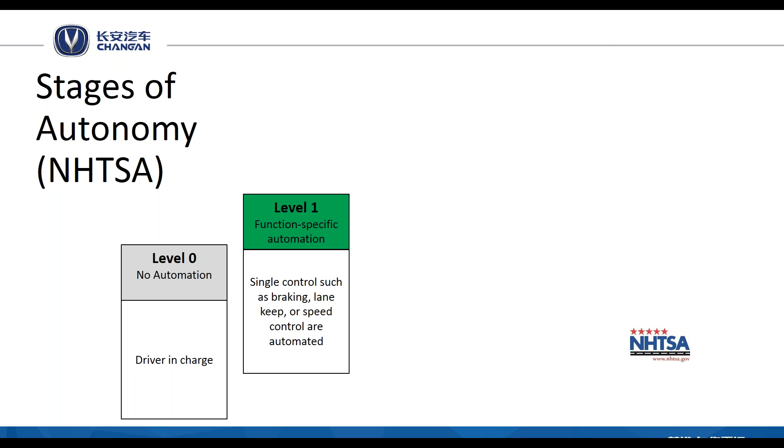Level 0 automation: there's no automation, the driver is completely in charge. Level 1 means a single control, such as braking, lane keep, or speed control, is automated, and again the driver is completely in charge of the vehicle controls.

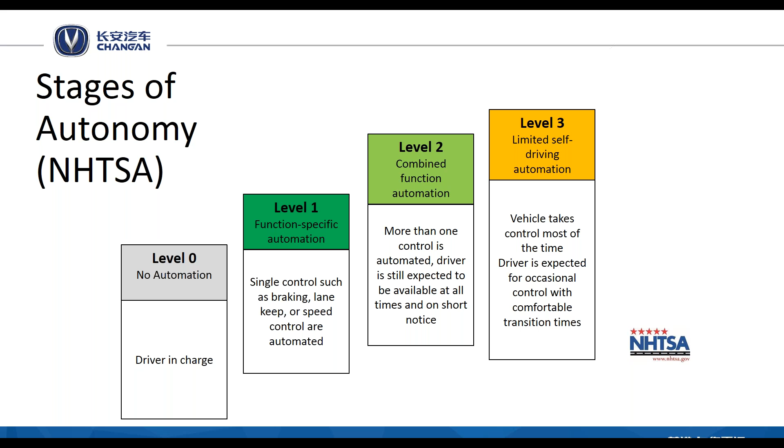Level 2 is combined function automation, so more than one control is automated. The driver is still very much responsible for driving the vehicle, and is expected to be available to take over on very short notice. Level 3 is limited self-driving automation. The vehicle takes control most of the time, and the driver is expected to occasionally take over with comfortable transition times.

Things like highly autonomous driving on a highway would fall into the level 3 stage of autonomy. And then finally, level 4, full self-driving automation. In this stage, the vehicle completely drives itself, and the driver is not expected to take over at any time.

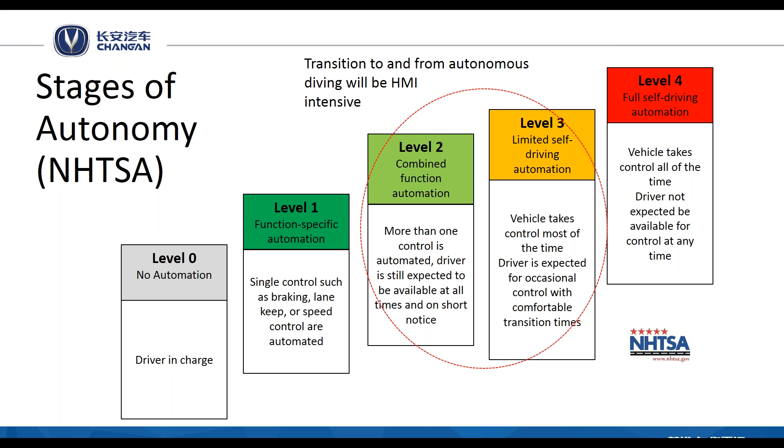As far as the requirements for these levels, they vary significantly. For level 2 and especially level 3, the transition of control will be very critical, and the solutions provided for level 3 and level 2 will be very much human-machine interface intensive.

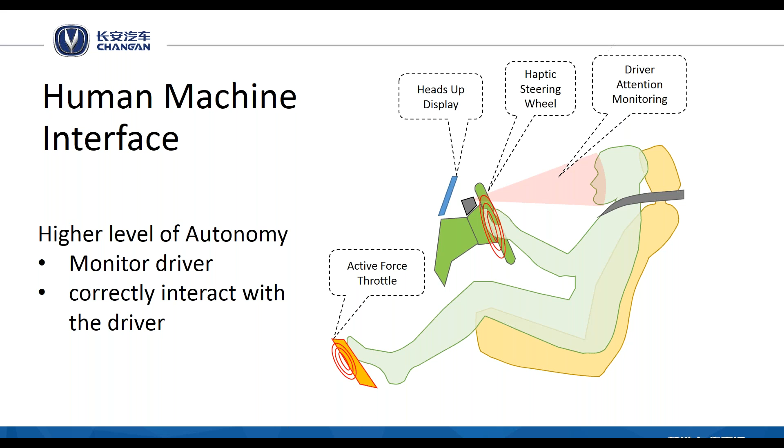For that, we have to have driver monitoring. Driver monitoring will need to assess the state of the driver when the transition of control happens, and then the vehicle will have to communicate properly to the driver, whether that's an active force throttle, active force pedal, or a heads-up display, or some other modalities of warnings like haptic steering wheel, haptic seats, or haptic seat belts. There has to be a very clear communication between the intention of the vehicle to hand over control, or the driver to engage and disengage from control.

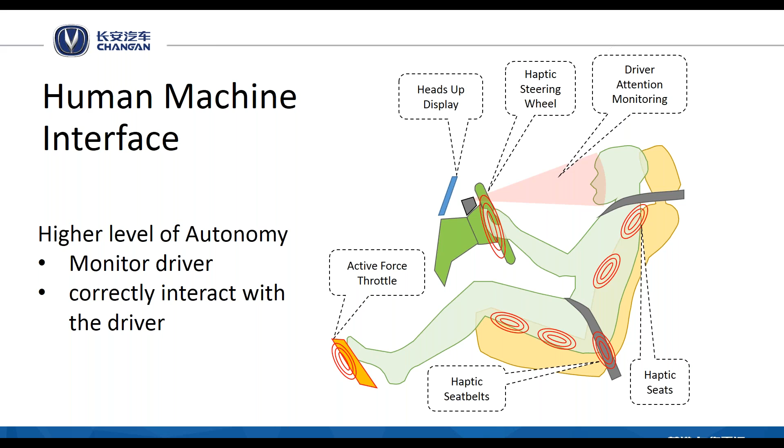So when we talk about the eyes of the autonomous vehicle, we have two modes: sensors that are looking outside of the vehicle, sensing the environment, and sensors inside the vehicle, sensing the status of the driver, and so on.

For driver attention monitoring, the industry is thinking about a camera-based solution. What will the camera driver attention monitoring system do? It will detect drowsiness, fatigue, distraction. It might look for health monitoring, it may be used for security, maybe personalization, and it will definitely help in the controlled transition between autonomous and manual driving. It may also help in false alarm suppression.

For example, if it's more of a warning type system, and the vehicle is about to warn the driver, but the driver is actually paying attention to the threat, the vehicle does not need to warn the driver very intensively. What can it do in the future? Research is ongoing to detect driver intention, or driver mood, and so on. Why camera? Camera is a very low-cost device, highly available, compact, and easy to research and develop. Of course, there are lots of issues with camera.

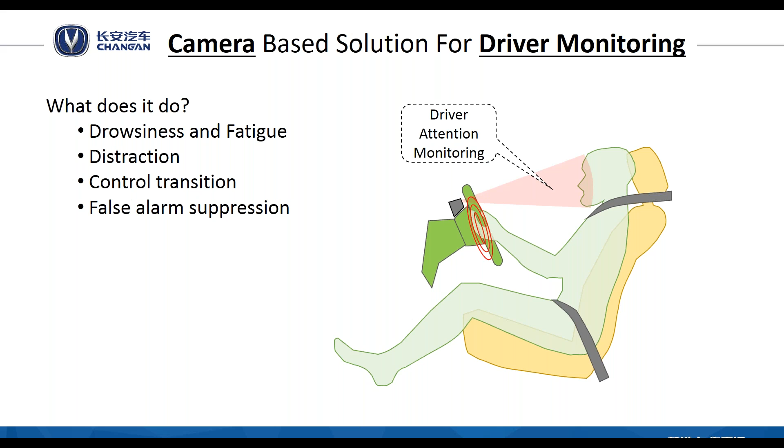How driver monitoring is implemented: it's lately starting to be utilized using artificial intelligence and neural networks, but it can also be implemented in classical ways to detect face, eye tracking, head pose, eyelid estimation, and so on.

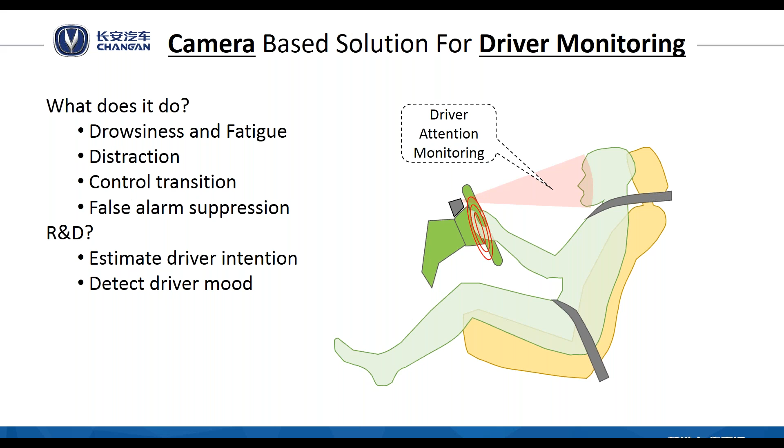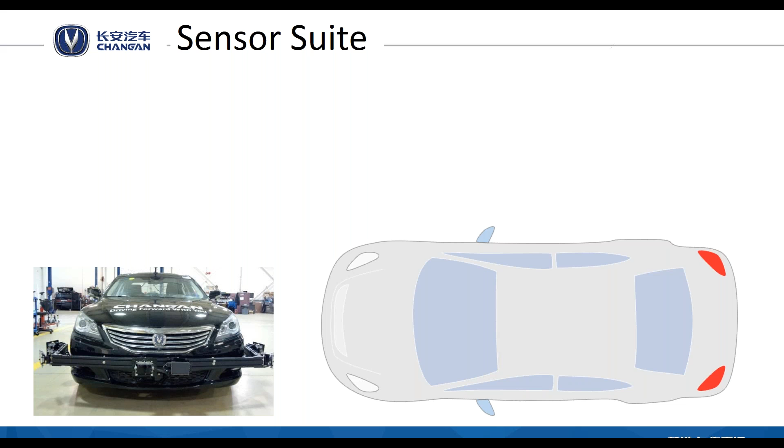Now I want to talk about sensing outside. Our philosophy at Changan is to put as many sensors as possible in prototype vehicles, and we divided the sensors into three categories.

The first category is to do environmental perception. For that we can use a number of LiDARs, maybe 4 or 6, or a high definition LiDAR with 64 lines or so.

We're also using radars—long range, medium range, and short range—maybe on the side to detect oncoming traffic. We're also heavily using cameras, anywhere from 4 to 8 on a vehicle, looking forward, to the side, or for blind spots, and so on.

Traditionally we've also used ultrasonic sensors a lot, because they're inexpensive and easy to integrate. However, this sensor suite has a lot of redundancy. Our goal is to put in many sensors, do a proof-of-concept type of work, and then work toward reducing the number and types of sensors to more production levels.

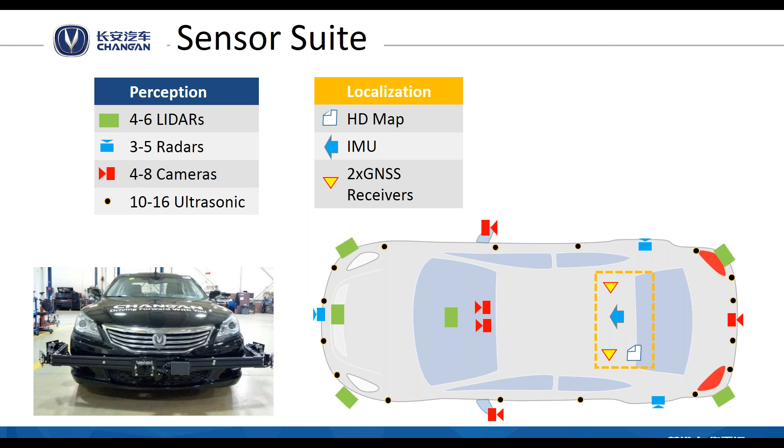Another type of sensor is used for localization. We're looking at high definition maps, and at the moment with our prototypes we're using high-grade inertial measurement units as well as differential GPS receivers for highly accurate localization.

We also have a communication sensor suite. For this we are utilizing DSRC, and we're also adding cellular connectivity to the prototypes, with interest in satellite communication as well.

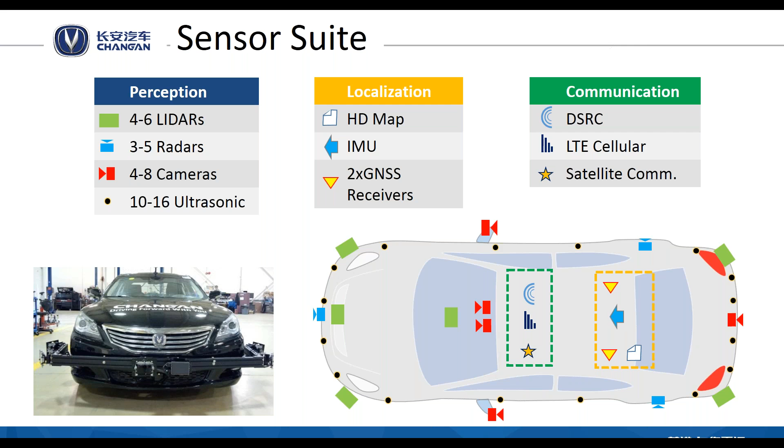These communication modes have different purposes. For example, DSRC is used at the moment for warning applications and for things around the car, typically for immediate warnings, not necessarily for downloading maps. Cellular communication is more used for downloading and updating maps, providing GPS corrections to the DGPS receiver, and so on.

So why camera for environmental perception? What does it do? Camera detects lane markings, lane widths, and road features. It can also detect signs, stop signs, speed limits, traffic lights, static objects such as walls, buildings, and poles, and moving objects like vehicles and pedestrians.

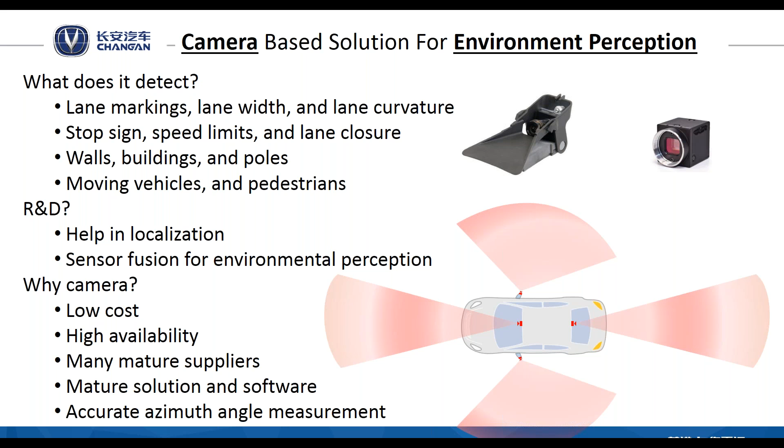What will be researched next will be doing sensor fusion of camera with other devices—radars, LiDARs, and DSRC—which may help in localization. Why camera? It's low cost, high availability, with many mature suppliers, and mature software and hardware. One benefit of camera-based solutions is very good azimuth angle measurement compared to radar.

Compared to camera, camera has good azimuth angle while radar has very good distance measurement. So in sensor fusion, these two sensors will give their best to provide better perception.

The next sensor we're looking at is LiDAR, and we want to use it for two things: for environmental perception, meaning finding out the vehicles and roads in front of us, and also for precise localization.

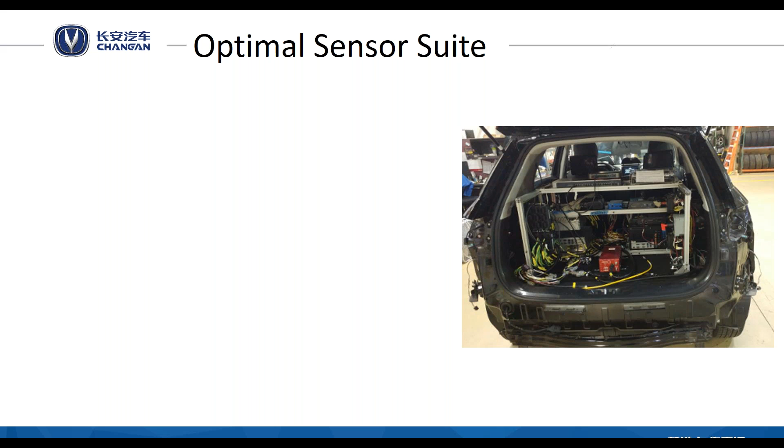Now, as far as the sensor suite, we have all these different sensors as input: radars, cameras, ultrasonic, maps, GPS, DSRC, CAN, vehicle information, and so on.

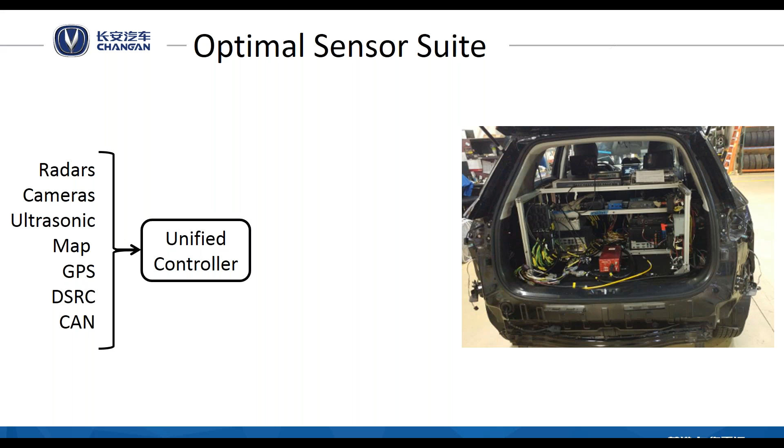Traditionally it has been very distributed functionality in the vehicle. So we can have two options: we can have sensor fusion done on an object level, or we can have sensor fusion done on a much lower level with raw data, for example raw point clouds from LiDAR and raw returns from radar. If you do low-level sensor fusion, that will actually require a much more powerful processor, and it will be a more centralized or unified controller.

So this unified controller has to do sensor fusion, detect pedestrians, vehicles, lanes, do the tracking, perform awareness functionalities, path prediction, route predictions, control the human-machine interface, and also control the vehicle. So this is computationally very, very intensive, and communication is a big deal here as well.

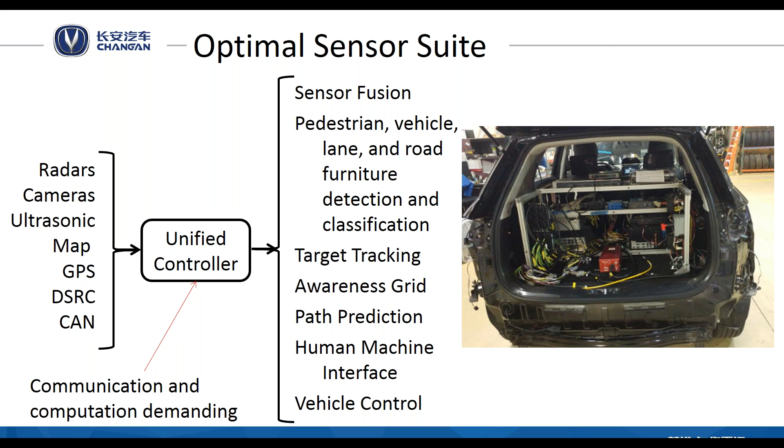And on the right side, you see at the moment how our prototype vehicle looks like. There's a lot of equipment in the back, and that will all be shrunk into a much more powerful ECU. So 16-bit, 32-bit controllers are not going to cut it for this kind of functionality.

All right, so with this, I will end my talk.

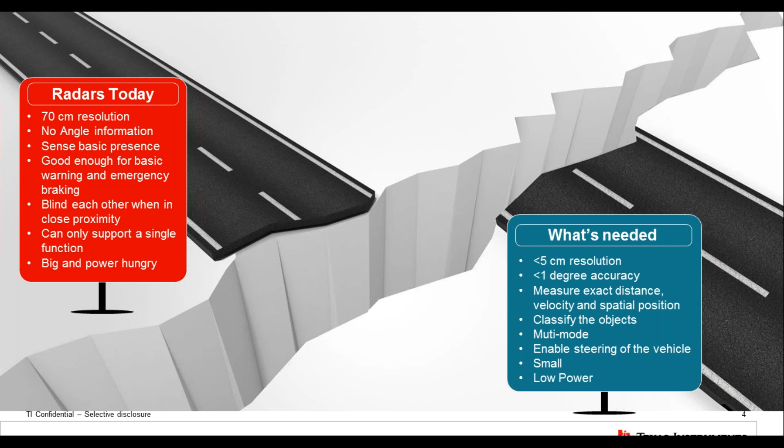So if you look at these two requirements, this is not a simple evolution. This is a discontinuity, and the reason we title the presentation the way we do is the existing technology used for building these high-frequency microwave sensors - silicon germanium, to be specific - it will not be able to bridge this gap.

So when we say it will not be able to bridge this gap, the question comes: what is the answer the industry is looking at? Texas Instruments is not the only one pushing this envelope, but I'll talk specifically about what we have done. The challenge the industry always had was building a transistor which will operate at these high frequencies - we're talking about 77 and 81 gigahertz frequencies. These are way up in the mm wave range. It's not easy to build this with standard CMOS. But once you get to standard CMOS at these frequencies, you can add all the extra features or smartness needed to make these high-frequency circuits operate in a way where you can get from the red board to the blue board, right?

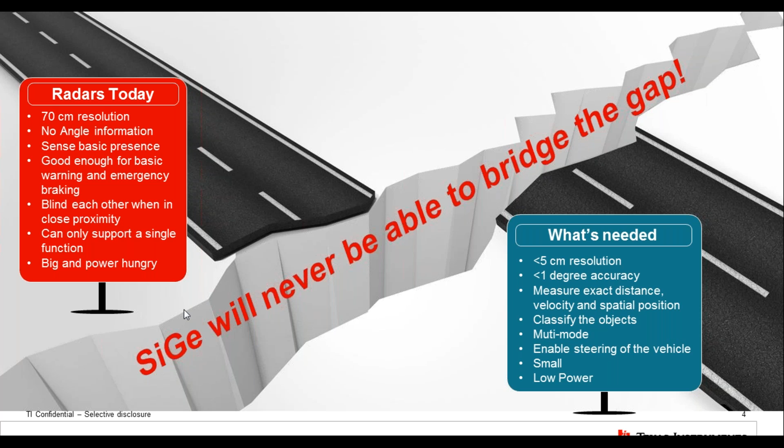The challenge really has been how do we get it to a mass production standard CMOS, which will enable the integration, smartness, and low power that the sensor portfolio desperately needs.

Looking at the TI specific investments we've done, we had a project in the TI Advanced Lab called Kilby, named after Jack Kilby, where we said let's squeeze everything into one single chip—the antenna, the baseband, the processing, all of that—and see how far we can push it in frequency.

This experiment, this trial research, tried building a 160 gigahertz radar sensor in a single chip. So you see various views of the package. On one side you see the silicon, on the flip side you see the antenna.

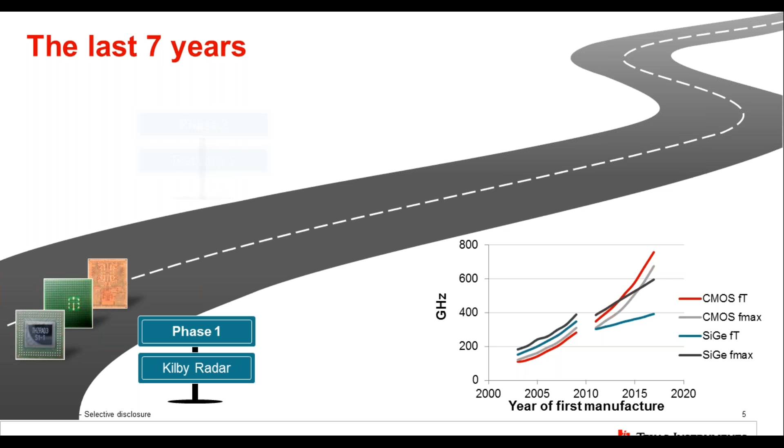This, on a standard FR4 PCB, will build a sensor which can see let's say 10 to 15 meters. The success of this gave birth to what's now the 77 gigahertz radar portfolio inside TI. So we went through a couple of phases.

The next phase was to translate from 160 to 77, because that's the frequency band the automotive industry wanted to use. Same approach—we had antennas on the package, 2 transmit and 4 receive, standard FR4.

This was again a successful completion of the phase, and with that, early in 2016 we started sampling what we inside TI called the AWR portfolio.

Essentially we get to a point where we can offer the industry, our customers, the means to enable a sensor which is the size of, let's say, a smartwatch, consumes an average power of a few watts, and can enable 4 to 5 functions in that box for pretty much every sensing need around microwave that I talked about in the last few slides.

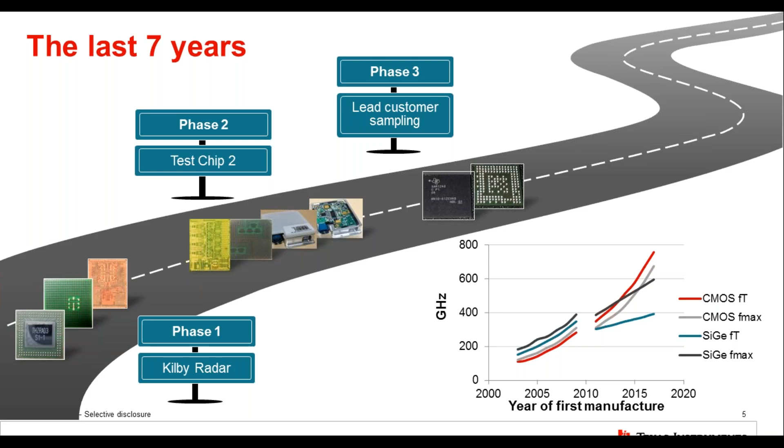So that's what I had to present today. Thank you.